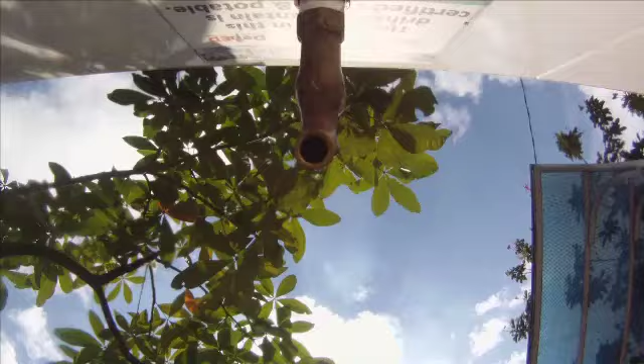Water. It is quick enough to slip through your fingers and strong enough to hold up a ship, hot enough to keep your stomach full, yet cool enough to refresh you on a hot summer day.

It can be tough enough to help you start fresh. It makes you think about how you look at life, whether the glass is half empty or half full. Most of all, it is nurturing enough to sustain your life and mine.

The miracle of water, often taken for granted and often overlooked. Where does water come from? The path of water is cyclical. Water falls from the sky and eventually finds its way to our rivers and streams.

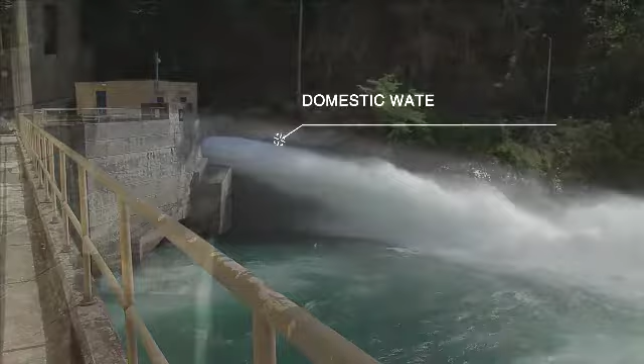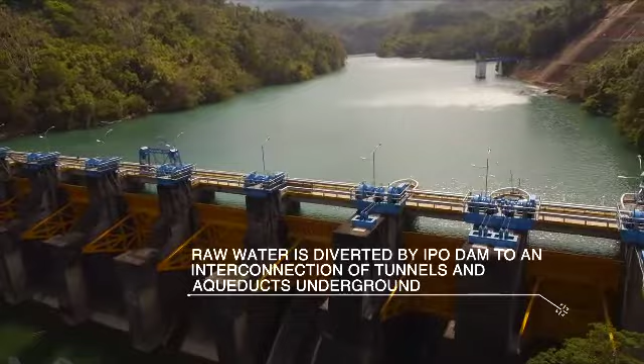The Angat Dam in Norzagaray, Bulacan is a multi-purpose dam built for domestic water consumption, irrigation, and power generation. From here, raw water is diverted by Ipo Dam to an interconnection of tunnels and aqueducts underground that all lead to La Mesa Dam.

This is La Mesa Dam, a reservoir that can hold up to 50.5 million cubic meters of water. La Mesa Dam acts as a primary settling basin. Heavier particles already settle at the bottom of the reservoir. From La Mesa Dam, water flows through another set of aqueducts into water treatment plants. What are water treatment plants? Let's find out.

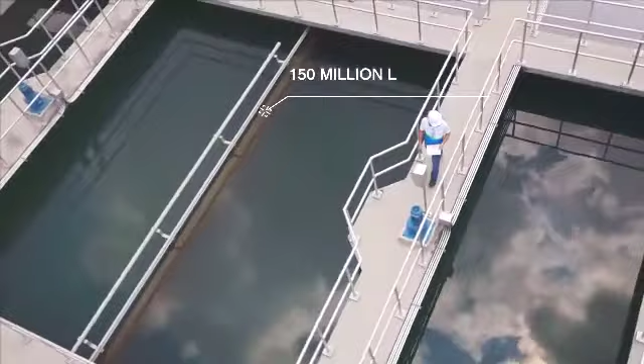East La Mesa is one example of a water treatment plant. It is the largest water system built by Manila Water and has the capacity to produce 150 million liters of potable water per day. Water treatment happens in this facility. The process of water treatment makes water safe for you to use and drink. What happens to the raw water from the dams?

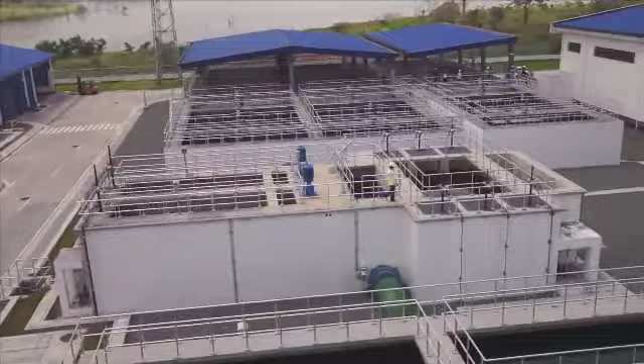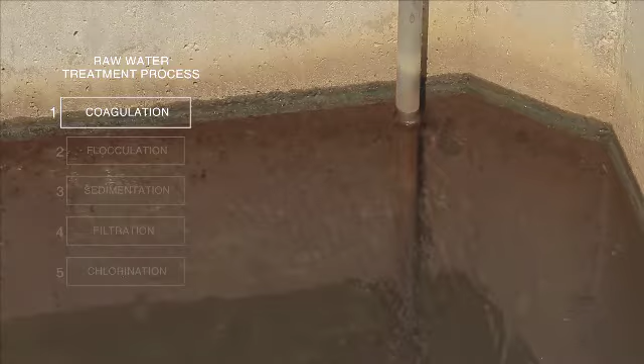The first step in the water treatment process is called coagulation. You can see an exposed pipe with liquid that is being added to the raw water. What is being added is aluminum sulfate, better known as alum or tawas.

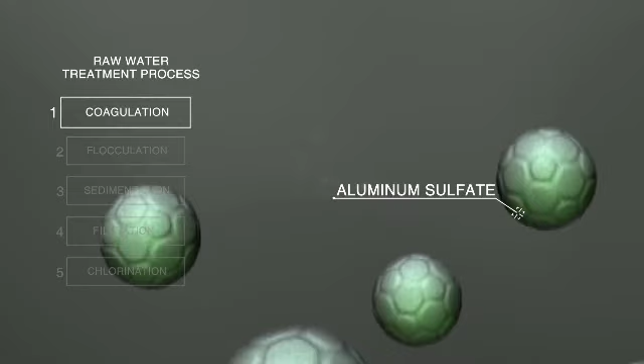Although chlorination deactivates some microorganisms and bacteria, there are still suspended and scattered particles called colloids that make the water hazy or turbid. Like similarly charged magnets, these tiny colloids naturally repel and bounce off each other. The alum or tawas neutralizes these colloids so they stick together. This is called coagulation. To help with coagulation, giant mixers below the water allow the alum to be thoroughly mixed.

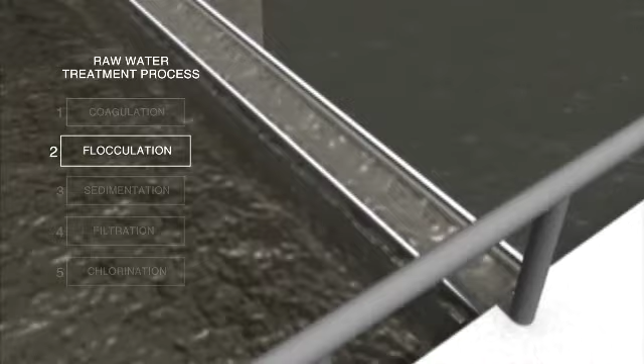The second step looks almost identical to the first step, except instead of alum, a substance called polymer is added. Down below, floating pinhead flocs begin to stick together as they encounter polymer. Imagine polymer as Velcro. Particles that encounter polymer stick to it.

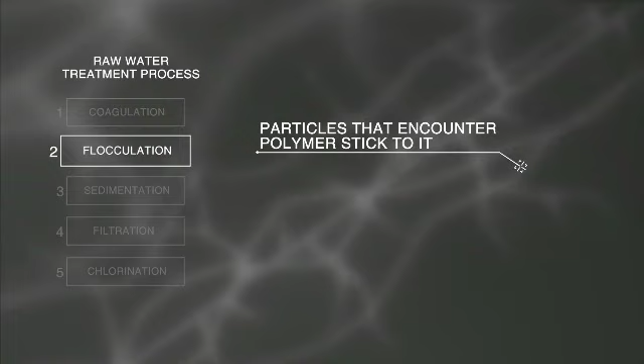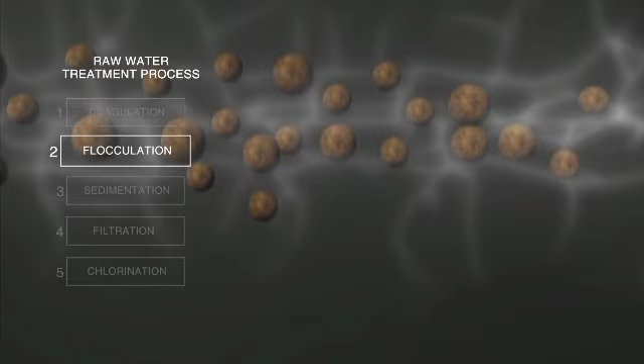The more particles it attracts, the bigger the mass becomes. As the particles increase in size, they become denser and sink. The particles that merge together are called flocs, and the process is called flocculation.

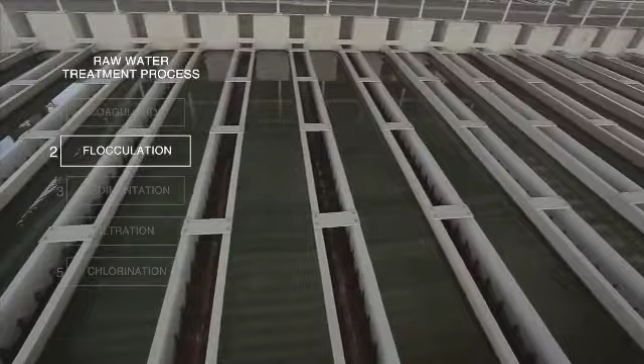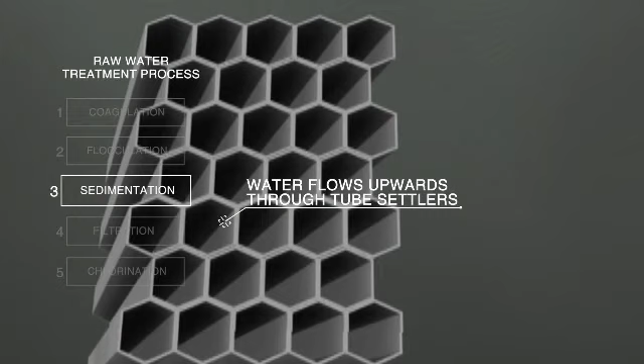Let's move on to the next step, which is called sedimentation. Water then flows below sedimentation basins and upwards through tube settlers. As water travels upward, encountering resistance from the diagonally mounted tube settlers, remaining flocs are trapped and once again sink. Clear water rises to the top, and the end result is called clarified water.

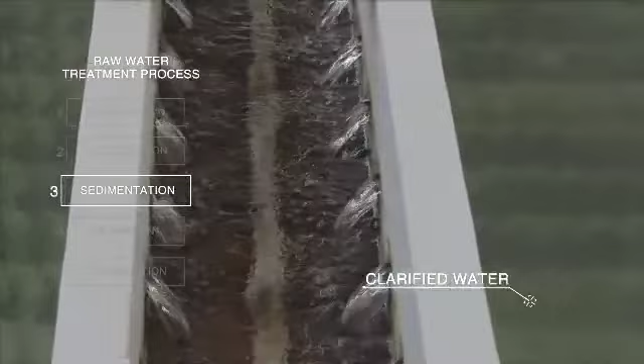Let's move on to step 4, which is filtration. There's a whole building here at East La Mesa just for filtration.

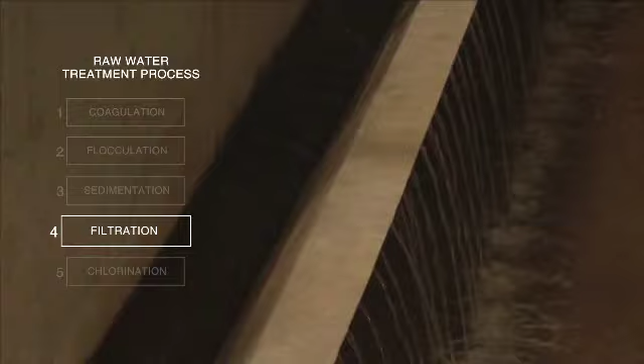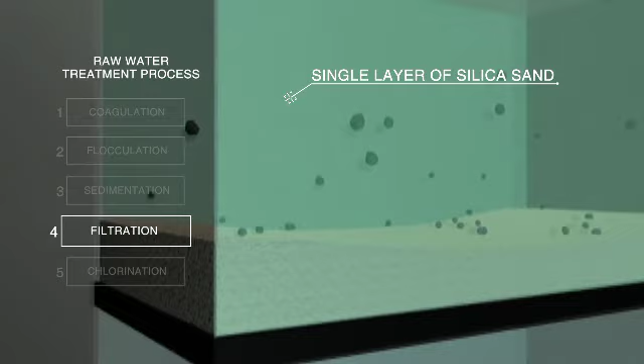Clarified water then flows through filter beds. Believe it or not, there are still tiny suspended leftover particles and harmful bacteria. At the East La Mesa water treatment plant, filter beds are composed of a single layer of silica sand, which is effective at filtering out the remaining tiny particles in the water.

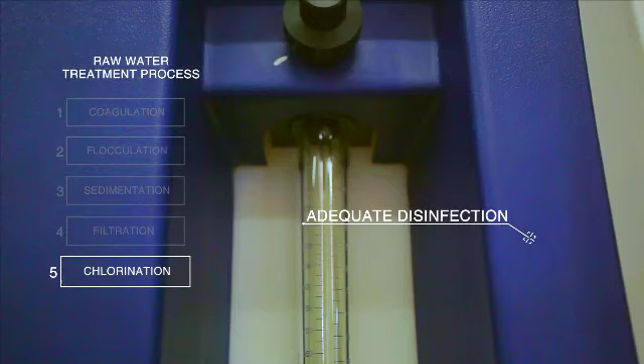The final step is called chlorination. Here, chlorine is added before water is pumped out for distribution to ensure adequate disinfection. These machines regulate chlorine. Take a close look at the yellow-green substance. That's chlorine in gas form. This is a precautionary step, and residual chlorine guarantees the potability of water that reaches you.

How does water get to your tap? Large primary lines from treatment plants run above ground, underground, and through creeks to bring water to reservoirs or storage tanks, just with the aid of gravity. However, in higher areas, water needs to be pumped to reservoirs and storage tanks.

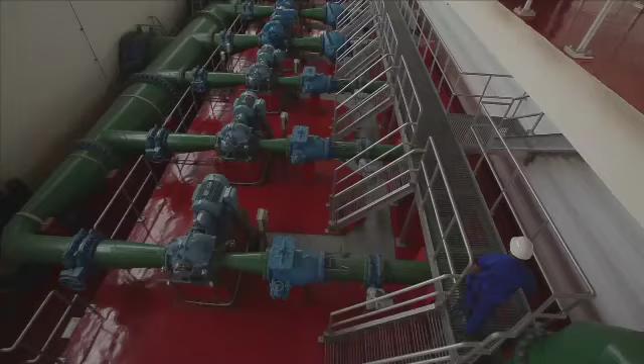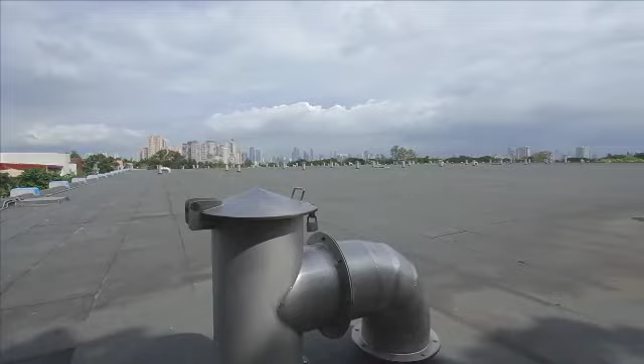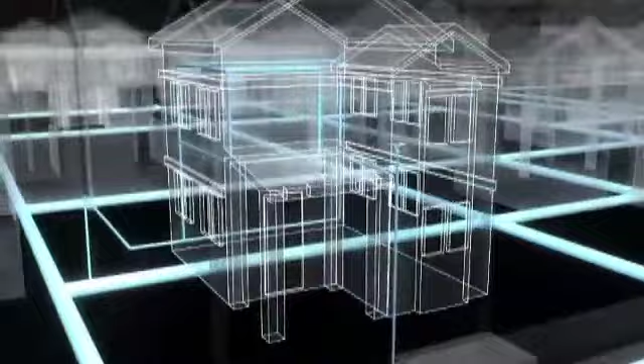Reservoirs or storage tanks are where water is stored before reaching you. This holding tank in Santo Domingo can hold water for 44 Olympic-sized swimming pools. From these storage tanks, treated water then goes through a network of pipes beneath the city. Water exits the network through a service pipe that leads to a water meter before entering homes, schools, and businesses.

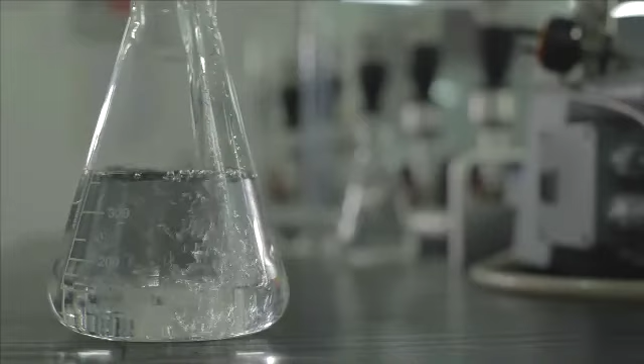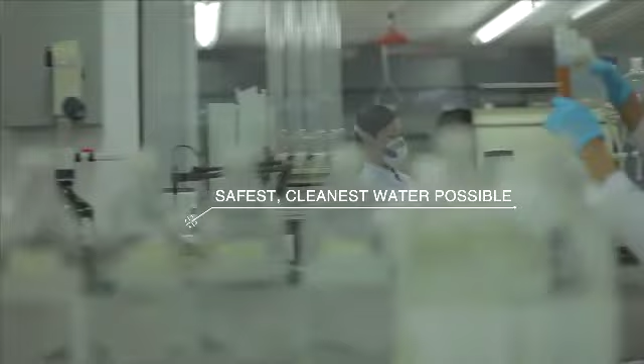How do we make sure that the water that gets to you is safe to drink and use? Our laboratory's world-class accreditations, recognitions, and standards are our guarantee that we work hard to make certain that you get the safest and cleanest water possible. The water quality of Manila Water has consistently surpassed the Philippine national standards for drinking water, set by the Department of Health and based on the World Health Organization water quality guidelines.

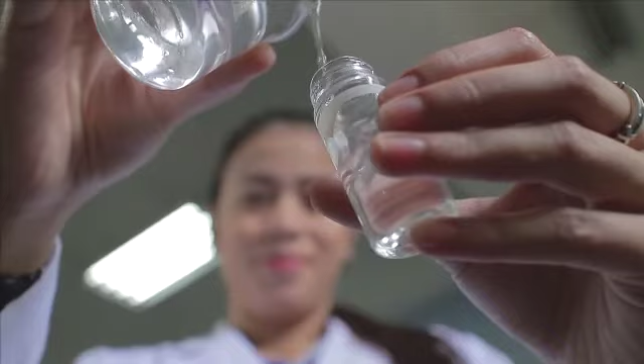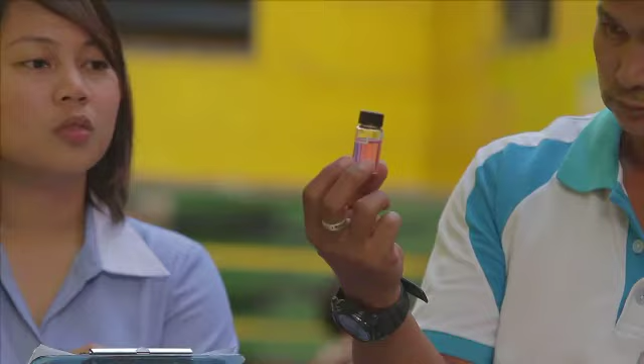Laboratory tests involve collecting water samples from different sources, treatment plants, and communities daily. Manila Water collects from more than 800 sampling points. Both DOH and MWSS also conduct their own sampling to ensure water quality. Here, we see water samples taken from a school and brought to the Manila Water Laboratory for testing to ensure consistent quality.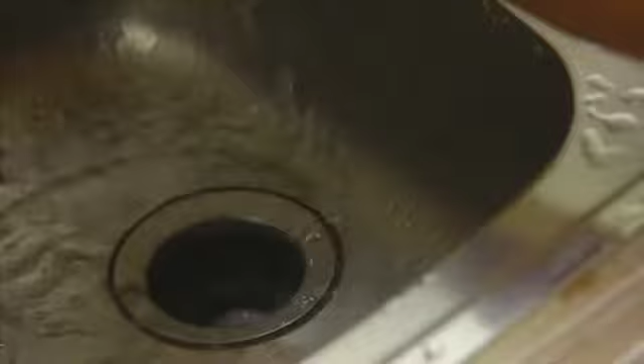But we're not only concerned about the water you drink, we're also concerned about the water you've used. So what about used water, like the water you flush down your toilet? Or the water you throw down your drain? What happens to it? Where does used water go? This used water is called sewage.

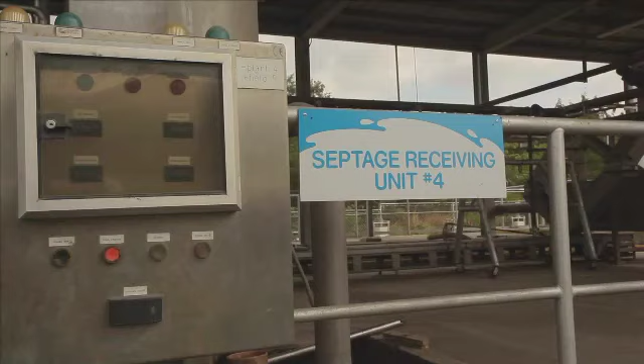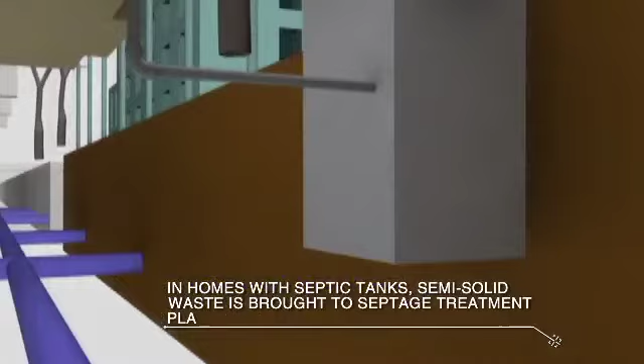Since Manila Water won the East Zone concession in 1997, it has developed two types of used water treatment plants: septage and sewage treatment plants. In homes with septic tanks, the sludge or mud-like biomass that accumulates over time needs to be collected by a desludging truck, then brought to the septage treatment plant.

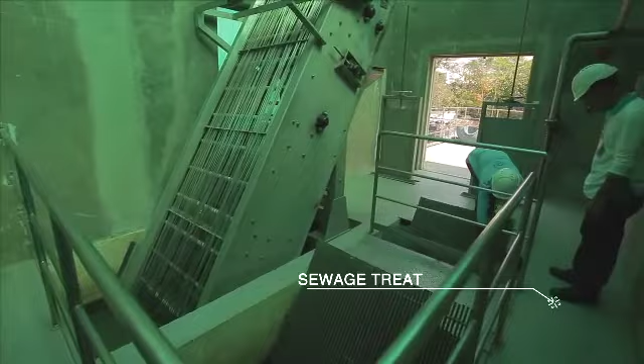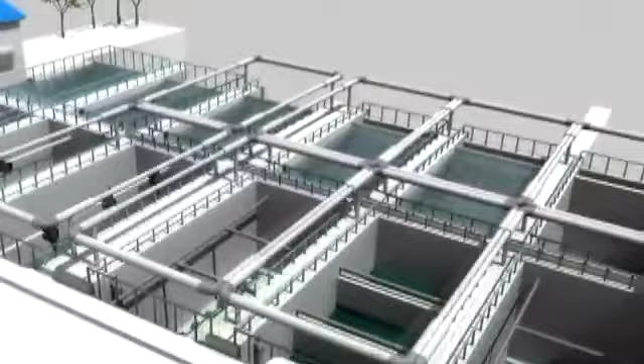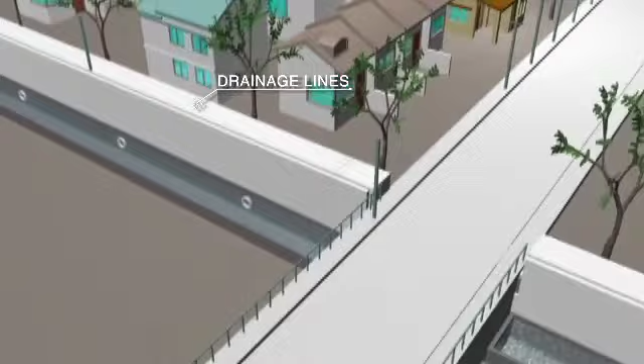Sewage treatment plants treat used water or sewage. This can be collected in either of two ways. For homes connected to sewer lines, used water goes straight to sewage treatment plants. In areas where sewer lines are not yet available, used water goes to drainage lines. Manila Water then intercepts the drainage lines by interceptor pipes and boxes. Instead of flowing straight to rivers, used water is diverted to sewage treatment plants.

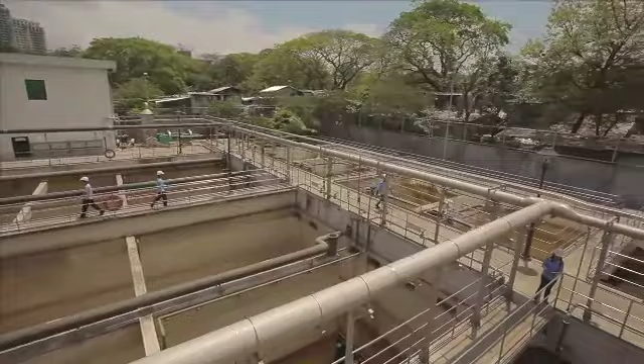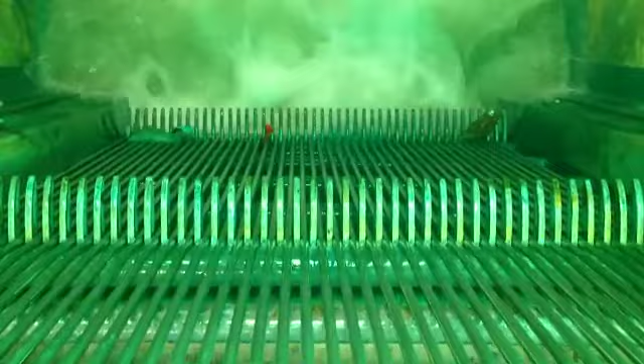This is an example of a sewage treatment plant. This is in East Avenue in Quezon City. Used water or sewage that is treated here comes from homes connected to sewer lines. You will notice that the water here is murky. This is because these tanks contain used water and not raw water. Used water first passes through a screening system. The screening system contains several chambers which remove objects such as plastic, hair, rags, sand, and grease.

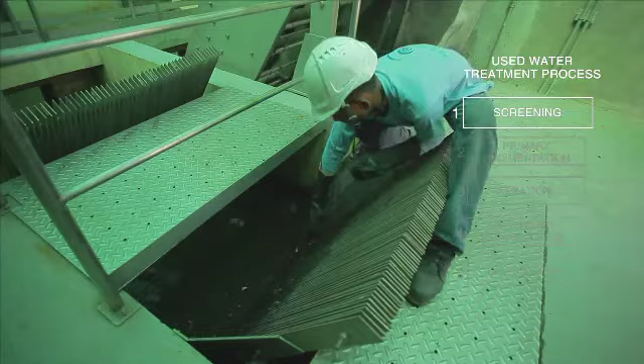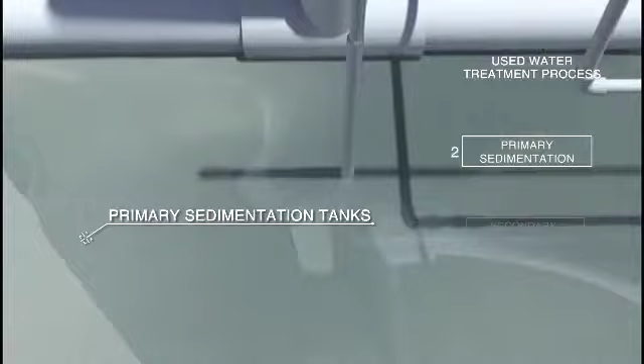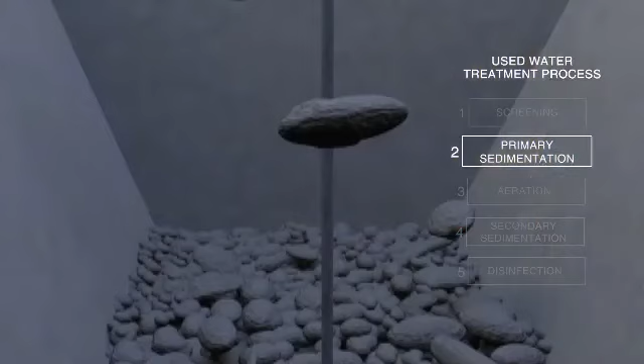After screening, used water is then distributed to primary sedimentation tanks. Notice how these tanks are shaped, wide at the opening and gradually tapering off at the bottom. Here, remaining large solid particles like sand, silt, soil, and gravel settle at the bottom of the tank. Gravity pulls the particles downward.

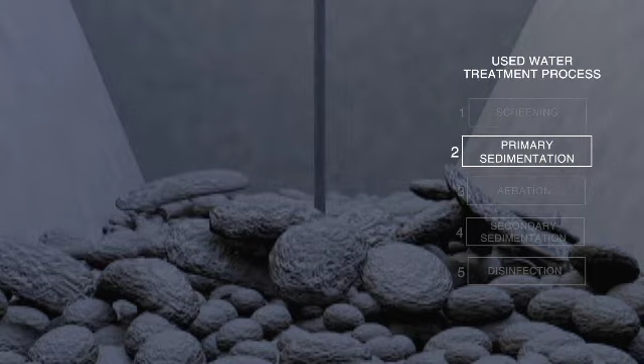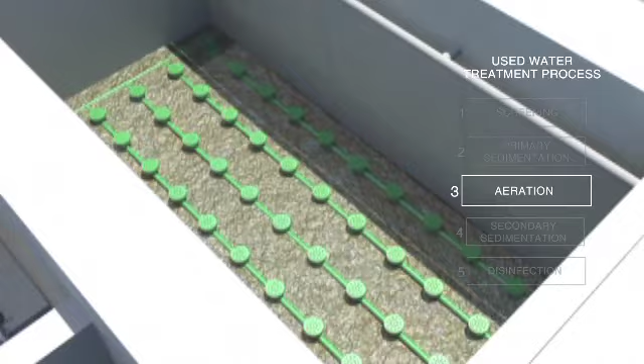After used water is clarified, it then enters aeration tanks. Aeration is the heart of the used water treatment process. Aeration tanks have diffusers where air is released from blowers. The air is essential to keeping the microorganisms alive that consume most of the pollutants in the water.

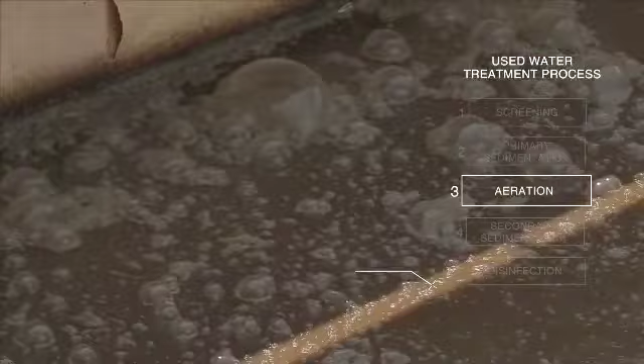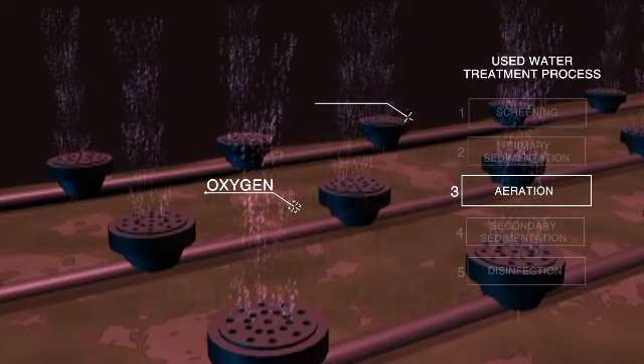These microorganisms thrive in the mud-like biomass called activated sludge. Before we go to the next process, what is all the fuss about activated sludge? Activated sludge is the most important and interesting stage of the treatment process. What makes it interesting is that the microorganisms present in the activated sludge need oxygen to survive, just like human beings. These microorganisms use oxygen to consume the pollutants in used water.

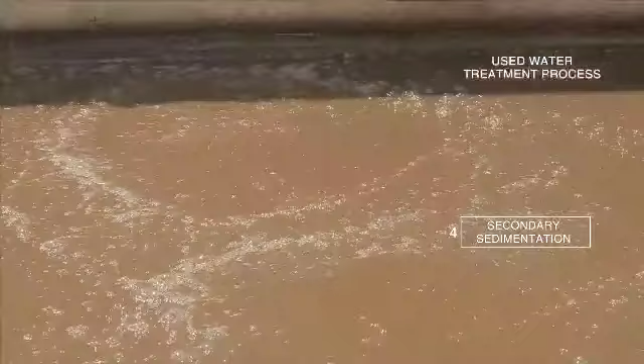After aeration, water goes through secondary sedimentation. Look at what happens here, as demonstrated with a clear cone. Thickened sludge separates from the treated water, and gravity pulls it down. After secondary sedimentation, some of the sludge is returned to the aeration tanks to maintain the required amount of sludge to consume the pollutants in the next batch of incoming used water. The sludge becomes activated sludge, kept alive by oxygen.

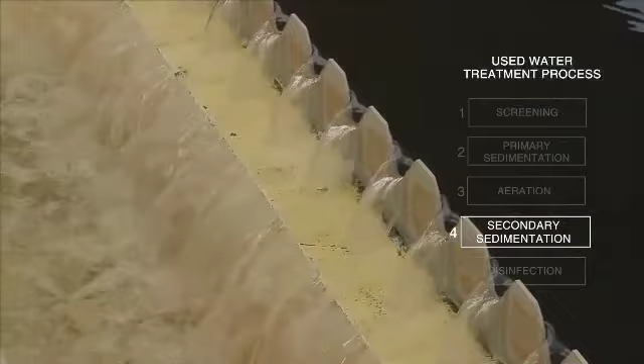Now that you've come to understand more about sludge, let's proceed to the final step in the used water treatment process. Disinfection. Chlorine is added before being released back to our rivers. Seems simple enough, right?

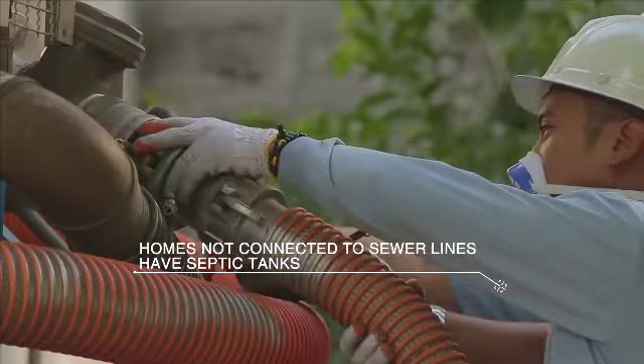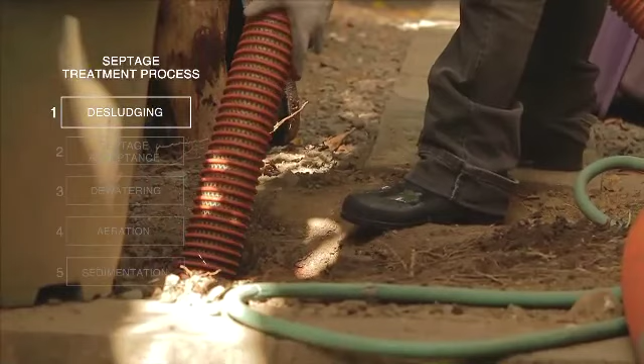But what if your home has a septic tank? Homes not connected to sewer lines usually have septic tanks. These tanks have to be cleaned through the process of desludging. This is the start of the septage treatment process. Desludging is the process of removing sludge called septage that has settled at the bottom of septic tanks.

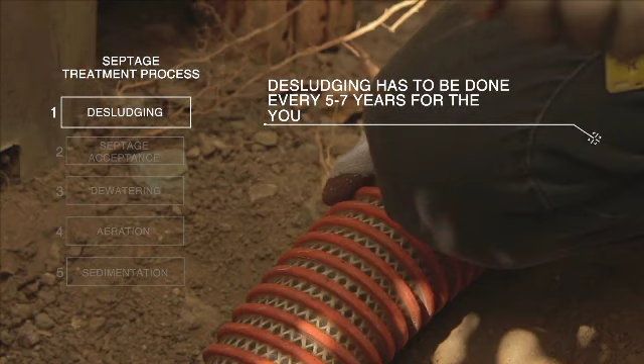Desludging is another service Manila Water provides. It needs to be done every 5 to 7 years. If you disregard this important responsibility, used water may seep into the soil or overflow and affect your family's health and the health of the environment.

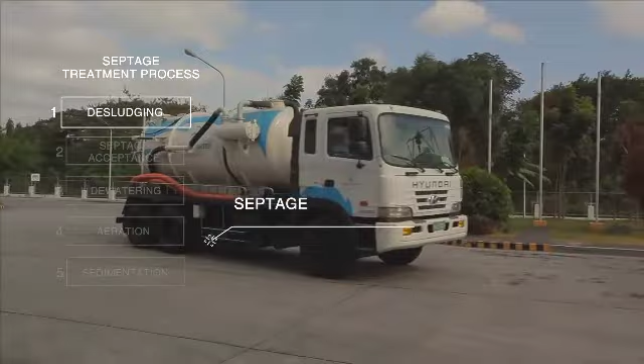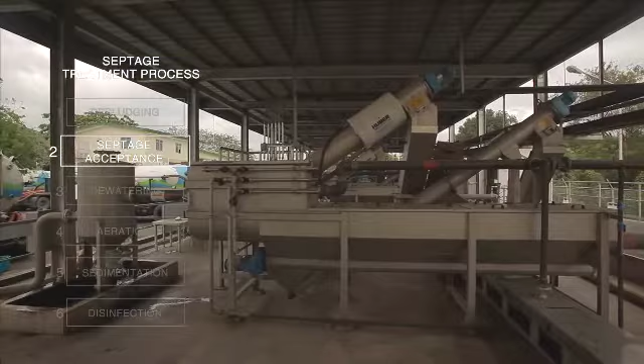After desludging, septage is brought to either of the two septage treatment plants of Manila Water in FTI Taguig and San Mateo, Rizal. Septage goes through a process of septage acceptance, wherein metal screens separate large solid particles from the liquid. Septage is then injected with polymer through a process called dewatering.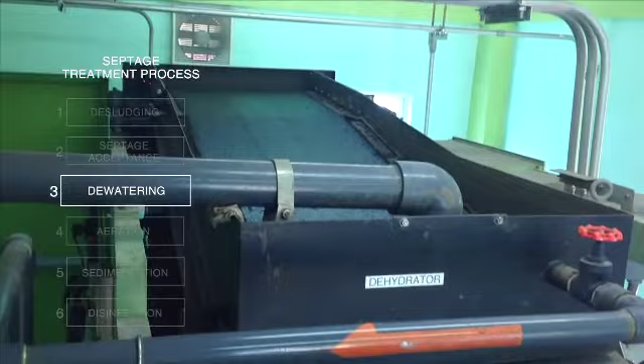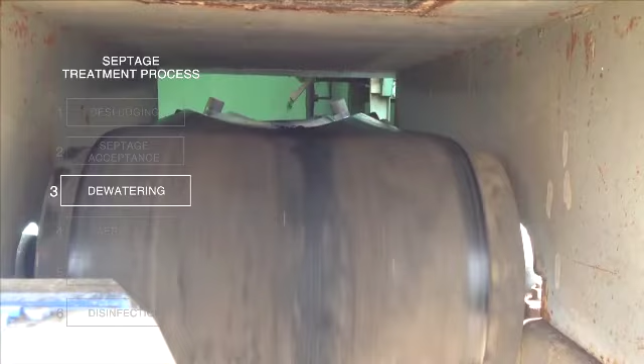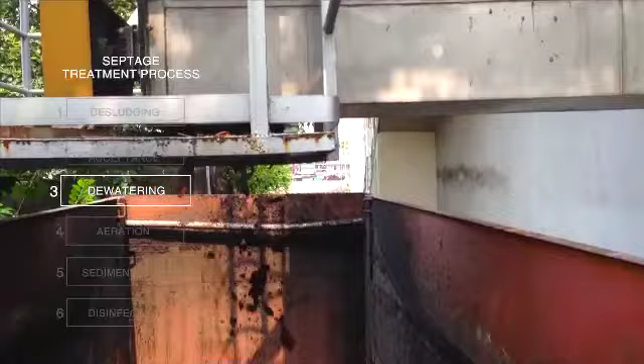Remember polymer from the water treatment process? Similarly, here it also acts as a binding agent that separates the remaining solid particles from the liquid. The solid particles combine or compact into a dark brown soil-like material. These are shipped off and further treated before it is used as a soil conditioner.

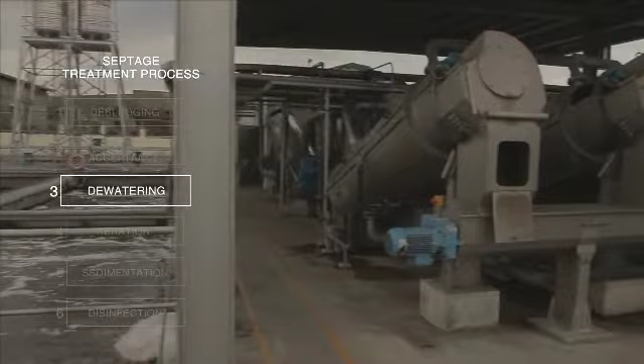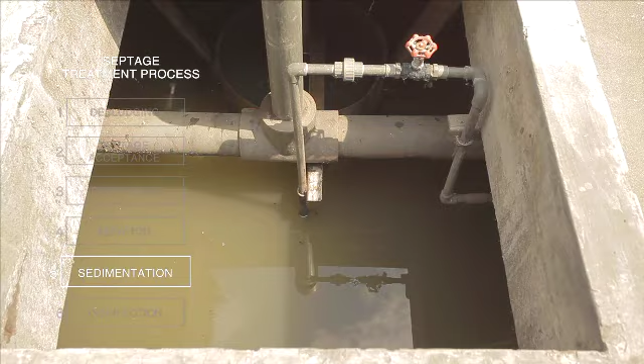Meantime, the squeezed out used water from the sludge is treated in the exact same process that happens in sewage treatment plants. Do you recall aeration, sedimentation, and disinfection? Treated used water is now ready to be returned to our rivers, which flow through larger bodies of water like Manila Bay and Laguna de Bay. This is considered Class C water, now capable of sustaining marine life.

The environment we operate in is important to us. Our Olandes used water treatment plant in Marikina is successfully integrated with its surrounding community and has a flood impact mitigation design. It is capable of treating 10 million liters of water per day. Our used water treatment plants in Marikina and Taguig are world-class facilities.

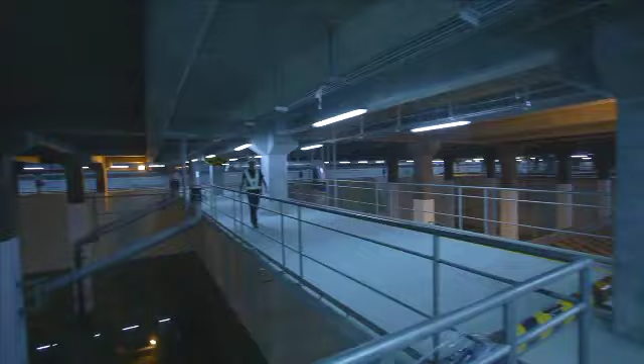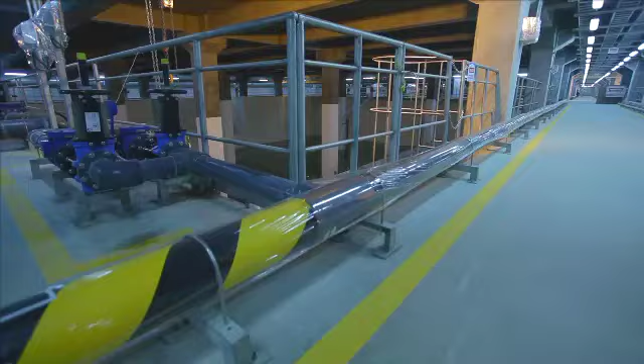Our Taguig facility is capable of treating 75 million liters of water per day. And as water is treated below, right above is a park open to the public. Clean, green open spaces like these help create urban renewal. But it doesn't end here, because water is a cycle.

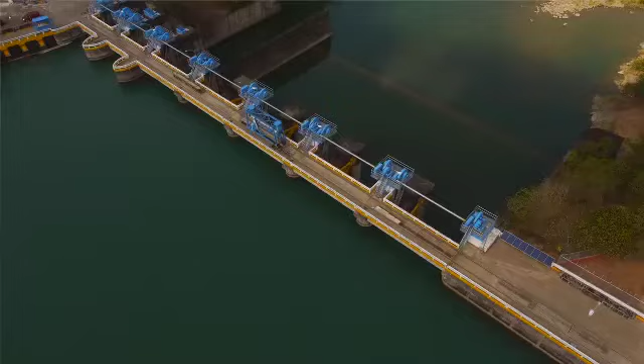The same water that falls from the sky is the water that is collected in dams and treated in water treatment facilities, making it safe to use and drink. After being used, the same water goes to used water treatment facilities to be treated and made safe for aquatic life before being returned to our rivers.

The same water in our rivers and oceans evaporates and becomes rain to once again fall from the sky into our dams, and the cycle repeats itself. This is the miracle of nature. Treating raw water and used water is a miracle of science. Think about the miracle of water every time you have a glass to drink.